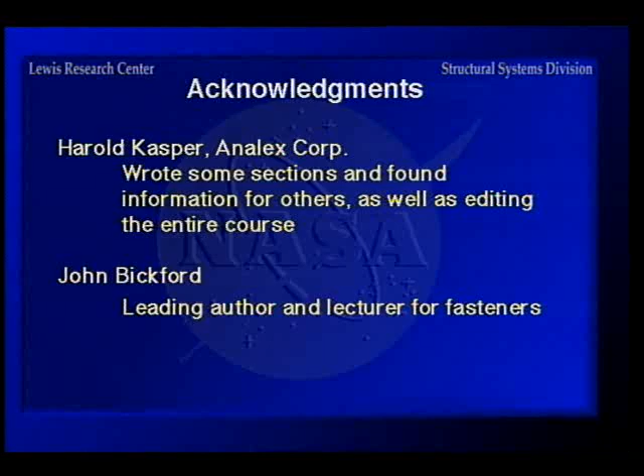John Bickford, who is the leading author actually in the fastener field, he is the editor-in-chief of a book which I was a contributing author for. It'll be published at the end of the year. I used a lot of John's stuff from his book on fastener design in this course. Bing Blendoff from Clemson University, who's actually chairman of the Bolting Technology Council, a council dedicated to furthering the knowledge on fastener design, has contributed some as well.

And Betsy Dela Cruz, who did all of the typing, retyping, running, and so on to get this thing together, and we just about ran out of time. But that's why we did not give it before, and I say it's approximately a 2-day course. Then Harold Kasper from Analex Corporation edited the entire course and had some very helpful comments. So with that in mind, we'll proceed with the little introductory material.

Now, there's a statement everybody knows about bolts and nuts, but do they really know about bolts and nuts? Sometimes we oversimplify things because we think because it's something that a kid took off of a wagon that it's simple for everybody.

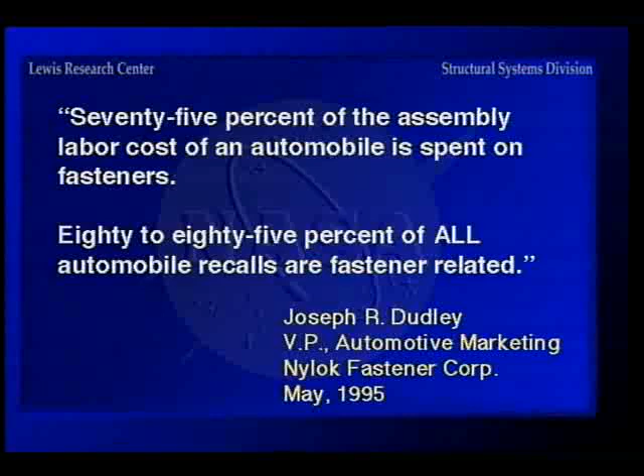Joseph Dudley, who is Vice President of Automotive Marketing for Nylok Fastener Corporation, gave these two quotes. 75% of the assembly labor cost of an automobile is spent on fasteners, and 80 to 85% of all automobile recalls are fastener related. Now that gives you an idea about the importance of fasteners in putting things together.

And of course, some of you remember on the shuttle recently when they had to cancel a spacewalk because a couple screws came loose and fell out in the gears. They couldn't get the door open. So things do go wrong like that.

Now, we have been hearing in the news for the past several years about counterfeit fasteners and all of that, and it's gotten quite a bit of publicity, and it should, but it still boils down to the fact that the designer has more to do with it than the manufacturer of the fasteners.

Now, here is something from John Bickford's book on a bolted joint, just a spring concept, because actually you don't think of it this way, but the joint material itself is a big heavy spring, and you're compressing it with small springs, which are fasteners, and we even get into joint stiffness and stiffness ratios and so on.

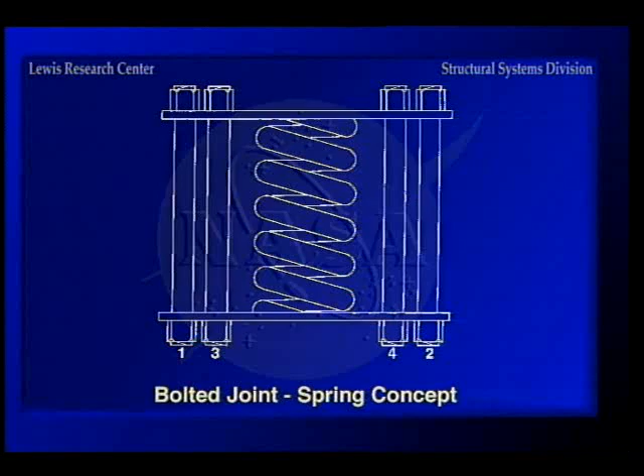Here's one on the internal drive systems, you can't read it too well on this one, but on the view graphs I think you can read them. A lot of these are common only to the aerospace world, like this, or the tri-wing type here.

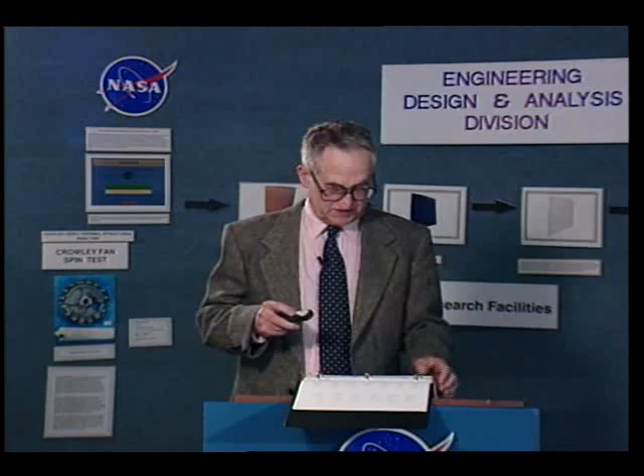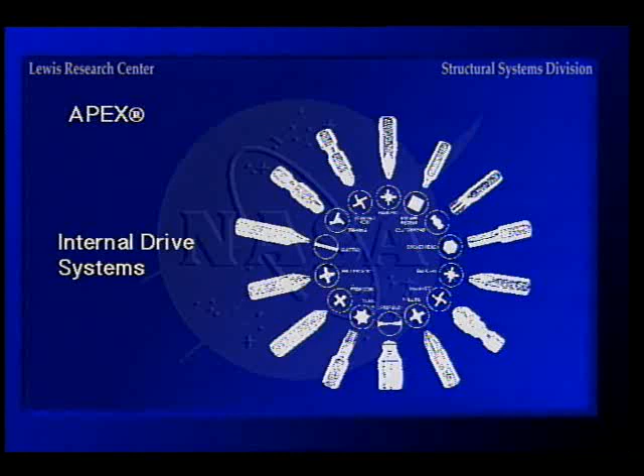These are used only by certain manufacturers. The Torx down here is very common in the automotive field. I always look at conspiracy theories of designers, and thought Torx was developed by automotive people just to make things more difficult working on your car, but I found out the reason they used it was that it centers better than the Phillips, of which there are various types, and will not cam out as much, so it works better in automated assembly.

So we'll move on into materials, and this I feel is a very important section, because you need to choose the right material to begin with, or you're dead in the water on a design.

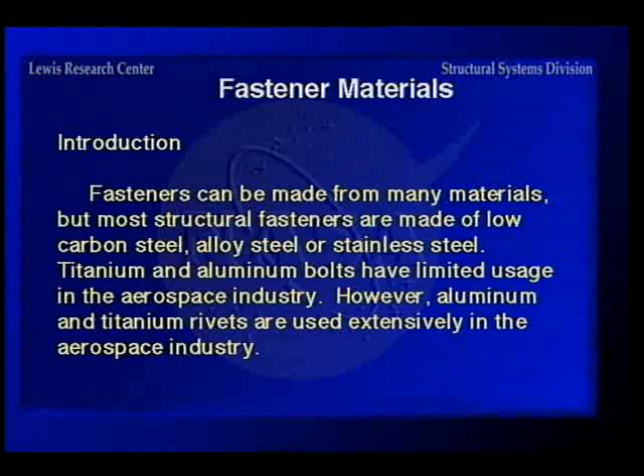Fasteners can be made from many materials, but most of those we're familiar with are made out of steel - the hardware store type made from low-carbon steel, and alloy steel for the grades 5s and 8s we use around here in the socket head cap screw. Titanium and aluminum bolts have limited usage in the aerospace industry, but aluminum and titanium are used a lot in aircraft design, particularly since you have aluminum skins on most airplanes, and you want the rivets to be the same material because differential temperature causes problems with expansion and contraction.

So now the alloy steel fasteners, you can get them up to 300 KSI - KSI being 1,000 PSI, so that's 300,000 PSI strength levels. But I'll try to point out here that in most cases you really don't want to do that.

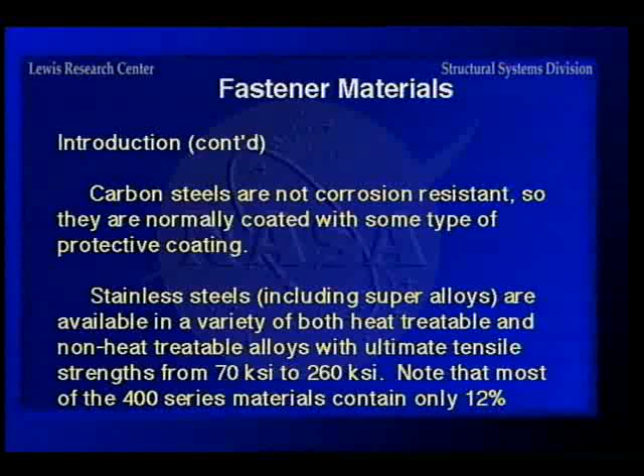Carbon steels are not corrosion resistant, so they usually have to have some kind of coating to protect them from rusting. The stainless steels come in all varieties, both heat-treatable and non-heat-treatable alloys, with tensile strengths of 70 KSI to 260 - the 70 being the ordinary 300 series stainless we use here all the time, and the 260 being work-hardened Inconel 718 or A286. Note that the 400 series materials contain only 12% chromium, which will allow them to rust some, so if you're building something you want to look pretty, the 400 series stainless would not be advisable.

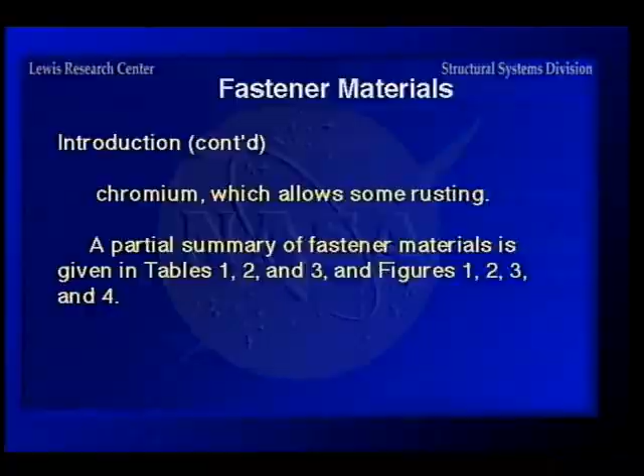On some of the subsequent tables we will show various materials, but let's go on in order to the selection of materials. You should use common fastener materials, strength levels, and coatings if you can.

There's no sense in overkilling on any design because it just costs you money and time usually. Weight savings versus cost must also be evaluated for flight articles, and there you do spend a lot of money to save a little bit of weight.

Galvanic and stress corrosion tolerance levels have to be established and checked out. And of course the operating temperatures have to be determined before the material is chosen, both the high and the low, to make sure the materials are compatible across the entire range. And then the type of loading, static or fatigue loading, is also a factor in material selection.

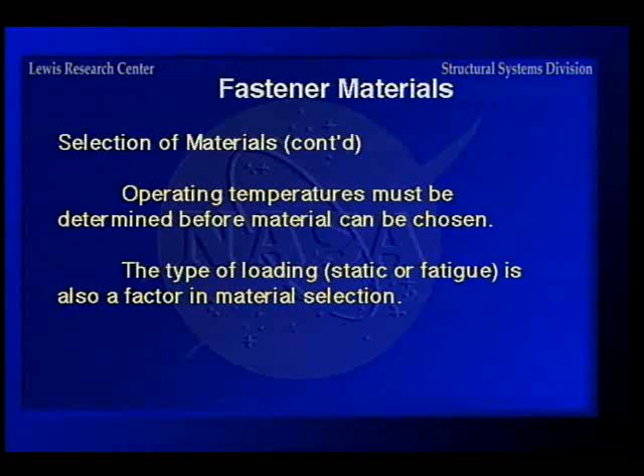Now, as far as availability of materials, the carbon steel fastener materials, everybody's familiar with the 1010, 1020 that we use around here. That's just iron with carbon in it and a few impurities, up to 0.28 carbon. I'll explain this further in another chart, but the carbon content is usually called out in points, and it's actually hundredths of a percent. So this 0.28 is hundredths of a percent of carbon.

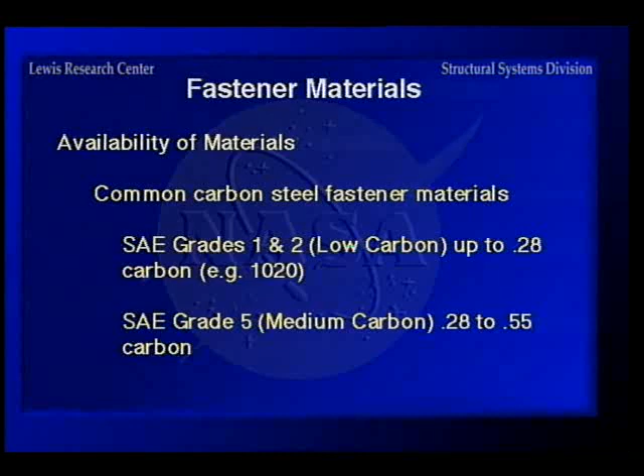And you need, for heat treating, unless you add something like boron to the material, about 25 points of carbon to get it to heat treat properly if you're going to heat treat a fastener. The grade 5s and grade 8s are in the 28 to 55 point carbon range so that they're heat treatable. The 8s have other alloying elements in them to bring them up to the strength that you want, and 4037 is one of the common materials for grade 8.

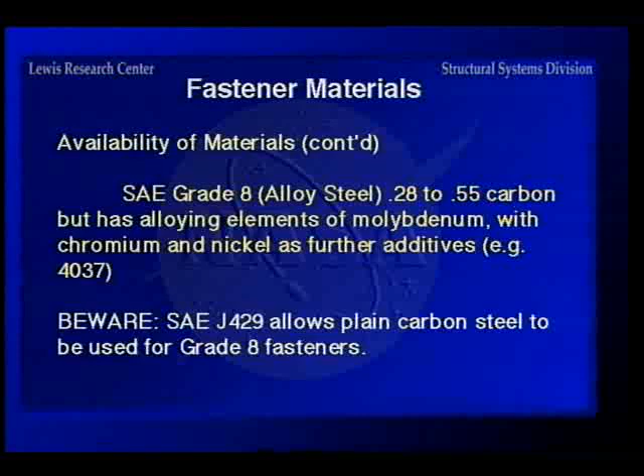Here's something I wanted to point out: Charlie Wilson from the Industrial Fasteners Institute has been trying to get this changed for years, but it's still in the SAE J429 spec for grade 8 fasteners. There's a footnote that allows the manufacturer to furnish these in 1045 plain carbon steel if the buyer agrees to it. The only thing is, if the buyer doesn't know he's agreeing to it, he can get one that will not have very good impact resistance. We had a problem we were in on one time with the Army on some Abrams tanks, where when they fired the cannon, it broke the bolts on the turret because they were made out of 1045 steel.

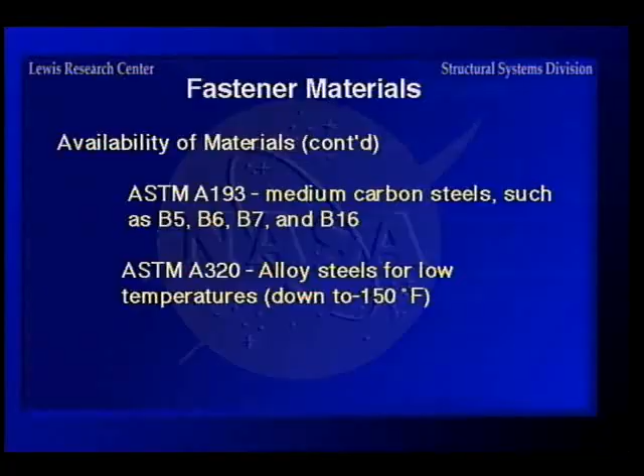Okay, moving on. Now, the ASTM fasteners are used primarily in the construction industry. Since a lot of you are not familiar with them, and I'm not that familiar with them either, I put in some equivalency here, like the A307 is a grade 1 in the SAE that we're familiar with, and 449, 354. The A193s are the B5, 6, 7, 16s, and also the B8 stainless steel. Those are used a lot for the pipe flanges that we design around here, so a lot of you are probably familiar with them. The 320 is an alloy steel for low temperatures, 325 is sort of equivalent to a grade 5 in strength, and the 490 is the highest strength of the construction type fasteners.

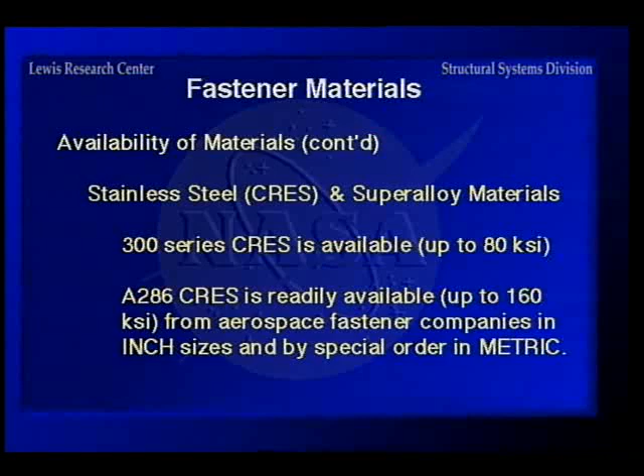Now, stainless steel, which is a CRES designation for it, corrosion resisting steel - stainless steel is the same generic terminology - and the superalloy materials. The 300 series that we're familiar with around here, you can get it up to about 80 KSI because it's not a heat treatable material, so the only way you can get the strength up is by work hardening it in forming, starting with annealed material. A286 we use all the time in the aerospace world, up to 160 KSI. It's a very common aerospace material, and you can get it in metric by special order. The 400 series is available in limited strengths up to 125 KSI, and it's also available in metric, which I will show you further on.

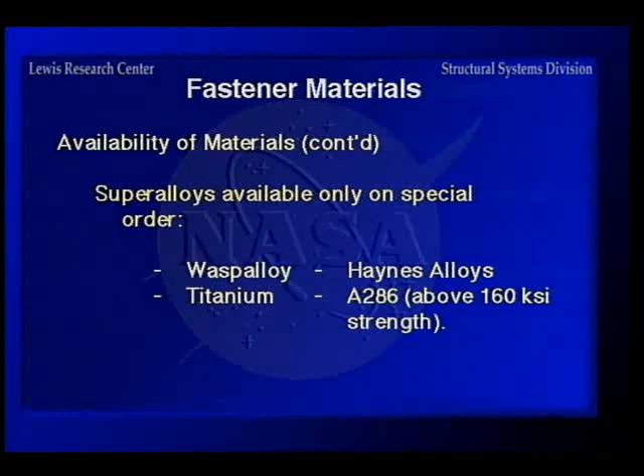Now the super alloys here, these are the ones that you guys come around looking for when you want something for a particularly stringent environmental set of conditions like high temperature, corrosion, and so on. These are all stainlesses here, well, titanium, of course, is very corrosion resistant also. The MP35N and MP159 are made by SPS, they have the patent on the material, and they are super corrosion resistant and high strength up to about 220 KSI. Inconel X750 is used for high temperature, and the Haynes alloys, and then the A286 above 160 KSI strength is a special, because in order to get it above about 160 KSI, you have to work harden it in addition to heat treating it.

Now, here's a table of fastener materials. I won't go through each one of these, but I wanted to point out how to figure out what the designation is. The AISI and SAE numbers are usually the same for the steel.

In this case, the 2 is the class of material, which is a nickel steel. The 3 is the approximate percentage of the main alloying element, which is nickel. And the 17 is the carbon content. So this is a low carbon alloy steel, 2317. That has no special significance other than illustrating the system.

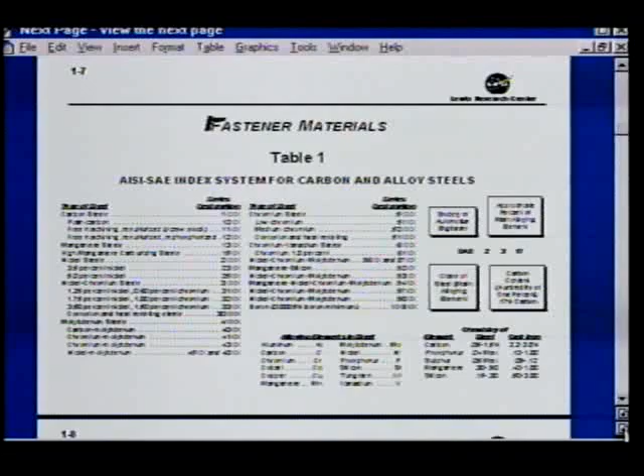Now for the nickel chromium steels and molybdenum steels and so on, here are the ones used mostly for fasteners in alloy steels, the 4000 series. You have 4037, 4140, 4340, that type of thing used for fastener steels.

Now, on chemical compositions, I'll stay with this table. Here you see the ordinary hardware store varieties, and you'll notice all of these other elements are not listed. One thing you can run into if you're having a real problem is that sometimes you get steels that have things in them you don't want.

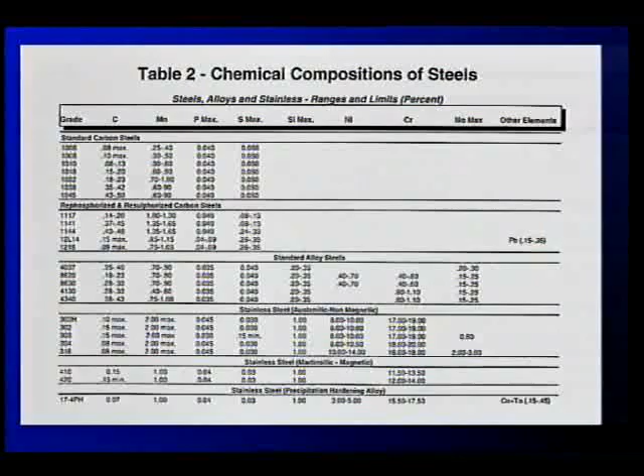A guy from Lincoln Electric was pointing this out to me, that in welding they're running into that because a lot of steel is made out of scrap. The scrap has most anything in it, so they're getting a lot of impurities they don't want.

Then you get down to the standard alloys, the stainless steels. One I wanted to call your attention to is in the 300 series stainless steel. They left out the L designations, the low carbon versions, because a lot of the time you want to minimize the amount of carbon in it, so you use a 304L or 316L or something like that, and they did not put that in the table, so you might want to just flag it.

All right, moving on now to operating temperatures. Here I have grouped this in categories, and so minus 65 and below, that's your cryogenic temperatures.

Now, of course, those of you who have been around long enough remember the Atlas and Centaur. They're liquid hydrogen fueled, so the temperatures you're running on that type of vehicle are anywhere from about minus 300 to minus 423. So you cannot use carbon steels at those temperatures because they will crack like glass.

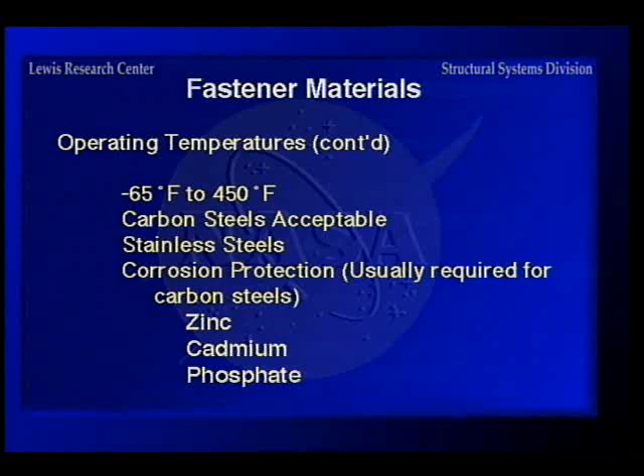Then you go to the minus 65 to 450 range, which is an ordinary range for most engineering designs. Carbon steels are okay, and stainless steels are okay, but then you get into needing corrosion protection for the carbon steel with various types of plating like zinc, cadmium, phosphate, or black oxide, and those will be covered later in the platings and coatings section.

Now, for 450 and above, believe it or not, you can use unplated carbon steel up to about 700 degrees because the only thing you're looking at is how much the allowable drops for the temperature. So if you go into a book like Mil Handbook 5, you can find temperature curves for carbon steels, find it, use it.

But the reason I'm saying unplated is that an awful lot of the platings for steels burn up before you get to that temperature. So these are some of the ones that don't hurt you, at least.

Now, I'm giving these because of their temperature range rather than the fact that you normally would not silver plate a carbon steel, but you do silver plate stainless steel. Silver, nickel, chromium plating, and chromium plating is used on some high-strength fasteners for aircraft landing gear, that type of thing.

The black oxide coating that you're all familiar with from hardware store bolts looks good and all that, but it burns off. Then you have diffused nickel cadmium, which is a special one that will be covered later. And then, of course, you can use the stainless steels and super alloys without anything.

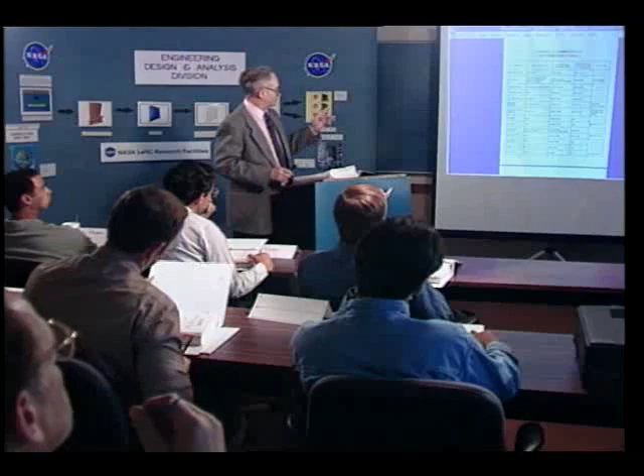You can't read this one, so I'll go over to this one. One of the things I wanted to point out is the useful design temperature on these. You find that A286 is one of the best, minus 423 to 1200. But you get down through all of these, and you find that Haynes 230 at the bottom is the only one that will carry you up to 1800 degrees.

Now, the significance of this is that on the NASA program, the National Aerospace Plane, we developed all of these super duper materials to build airplanes out of, but we never did anything on developing fasteners to put them together, because regular metal fasteners is the only thing they have to put them together.

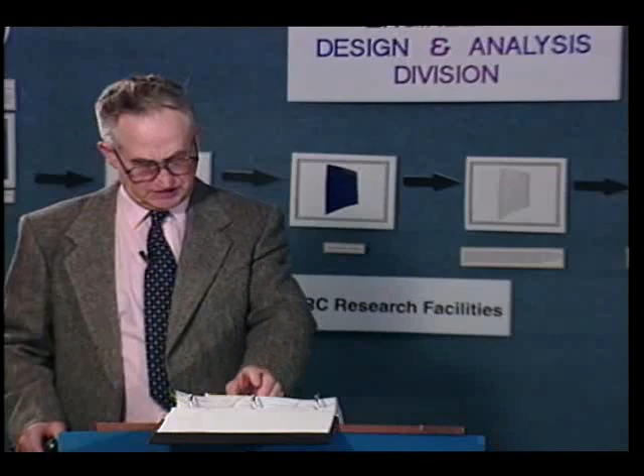Okay, moving along now into the galvanic corrosion and stress corrosion area. Galvanic corrosion is something we're all familiar with, although we may not use that title for it. If you get a scratch on the chromium plating on your car, it will rust faster than if it didn't have any plating on it, because you have a very small anode and a large cathode being the rest of the surface. So the anode is deposited on the cathode, which means it rusts away. So rusting is galvanic corrosion.

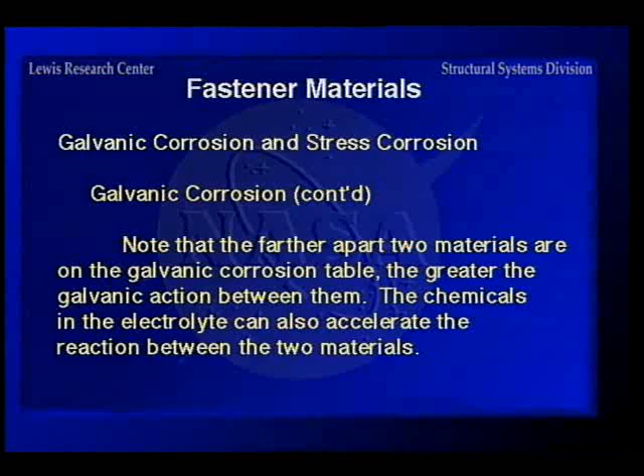Later on, we have a table on the galvanic series that will give you the location of these metals, and the farther apart they are in the table, the bigger galvanic corrosion cell you develop between the two of them. Cadmium and zinc are adjacent to aluminum in that table, which makes them compatible as coatings for steel fasteners used in aluminum.

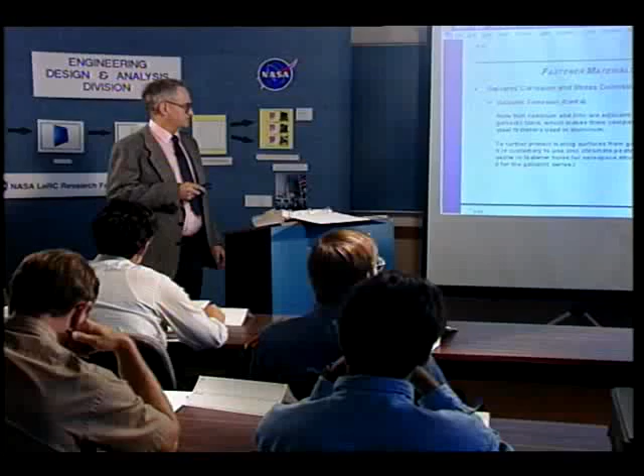To further protect mating surfaces from galvanic corrosion, particularly where you're putting in rivets and you pilot drill one piece and then drill it through, you have raw surfaces that are not plated with anything. So you either use a zinc chromate paste, or there's a Mil 8802 sealer that will deter galvanic corrosion.

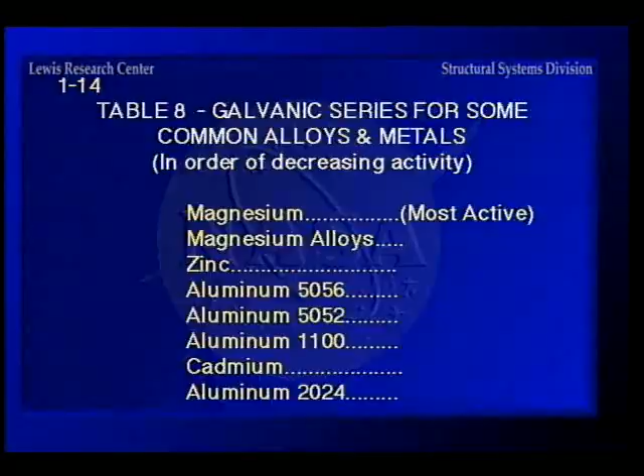Now here is the table of the galvanic series, and this is something you can find, I think Marks' Handbook and various places have it. One of the things I wanted to point out is that if you look at cadmium over here, it is right in the aluminums. Also, zinc is there. So if you use a cadmium plated fastener in aluminum, you will get less galvanic corrosion than you would, say, if you used one of these down here, like a brass or copper or Inconel or something like that.

Now, notice there are two different designations for the stainless steel: active and passive. Normally, stainless steels are passivated, which means they're treated with an acid dip to remove any kind of scale from processing, and to form a protective oxide on the surface. The passivation of steel corresponds to anodizing of aluminum. So that's why they have it shown differently here, passive and active, because the passive is much more corrosion resistant.

Okay, now going to stress corrosion. That is something we're all familiar with in a sense, but there's not much available in textbooks on it, because the study of it is a fairly recent thing. Stress corrosion occurs when a sensitive material is loaded in tension in a corrosive environment. That sounds pretty easy. What happens is the surface develops pits or cracks from exposure, and this gives you stress risers, which will cause the component to fail at as little as 20% of its calculated load capacity.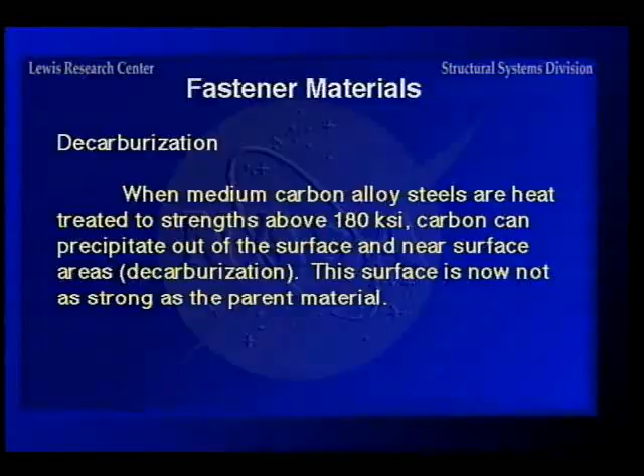Here's another one you can run into, although not as common as stress corrosion. When you heat treat a carbon steel, you can actually precipitate carbon out on the surface. I'd compare this to charred wood, which is very soft on the surface, because that's essentially what you're getting - a heavy carbon coat on the outer surface that's not as strong as the parent material. On machine parts, they sometimes just machine that off and use the part, but on a fastener you can't do that, so you have to be careful about decarburization. And once again, it's on strengths above 180 KSI.

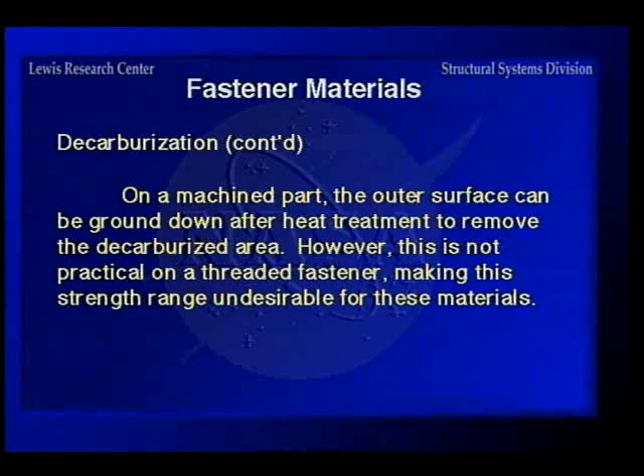Now, temper brittleness is another thing you can run into on high-strength fasteners. After you've quenched them, you need to go back and temper them, which means holding them at a fairly low temperature to get the strength you need. But that also causes the material to be brittle. So carbon steel fasteners above 190 KSI are a real risk as far as brittle failure.

If it falls below about 12%, the steel rusts. This is why, if you're going to have welded joints, you try to use a 300 series with an L designation, which is low carbon, and even use a low carbon weld rod. Or better yet, and this is what we did at Martin Marietta on the Titan, you use 321 stainless because it has titanium in it. Or you can use 347, which has columbium. The titanium and columbium will combine with the carbon before the chromium will, so that leaves the chromium in solution and you still have the corrosion resistance.

So keep that in mind when selecting fasteners for anything above about 800 degrees in stainless steel - use 321 or 347. Now, on material strengths...

After the temperature and corrosion requirements have been determined, then you've got to look at the material strength. Keep in mind that the higher the strength of the material, the more stringent the manufacturing and quality requirements become, because it's more sensitive to imperfections. If weight is not critical, it's better to use a lot of fasteners of lower strength than to use a few high-strength fasteners. Use those old grade 8s if you can, if you don't have to worry about weight.

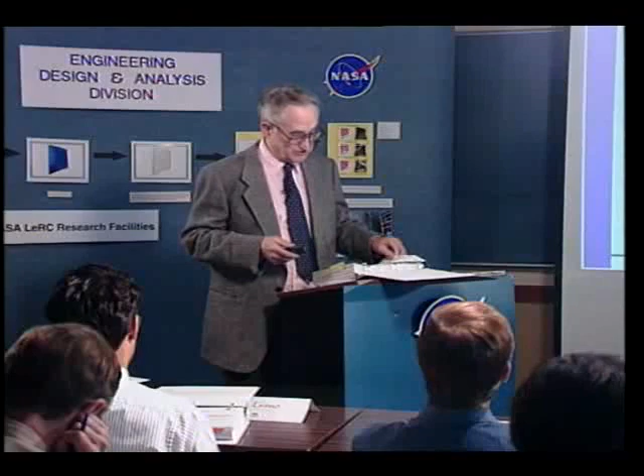Now here's metric fasteners, and that's one of the least understood things, I think, among most design engineers. I'll admit it's confusing to me, although my buddy Bing Glendoff, who came from Sweden, says that metric is the way of the world. He thinks it's great, but I still have trouble with it. So we'll go through some of the peculiarities of metric fasteners.

On the property classes, that's the way they specify the strength - tensile ultimate, and then yield as a percent of the ultimate, in megapascals. And a megapascal is 145.04 psi, for any of those who need to convert.

Now, the material is not specified in the call-out, so you have to specify the material yourself, or otherwise you don't know what you're getting. So if you have a property class 6.8, it's a carbon steel of some kind with an ultimate strength of 600 megapascals and a yield of 0.8 times that - that's where the 0.8 comes from.

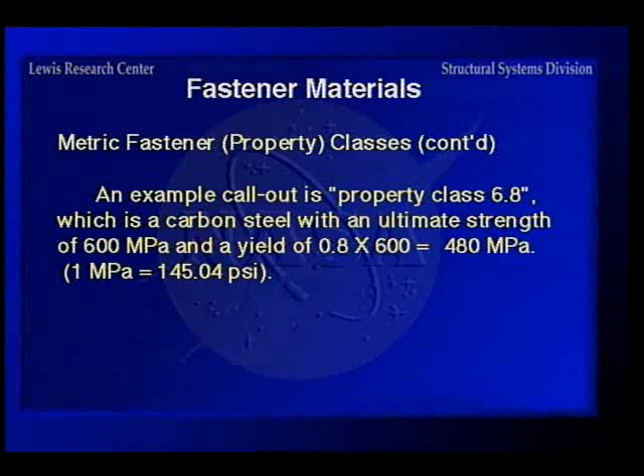Now, for some stainless steels, they don't use those rules, so I have a table further down the line that shows the peculiar type stainless steels and how they're called out in the metric system.

Here's something I had a little trouble getting people to understand, because when we had a government decree to go to metric fasteners for the CM1 project, or for all new projects, the metric aerospace fasteners are not available in the European market. They use American inch-pound fasteners on their airplanes. I toured the Huck's rivet plant in Tucson a couple years ago, and the chief engineer told me at the time that the A300 people were their biggest customer on fasteners, because there aren't any aerospace fasteners available in the European market.

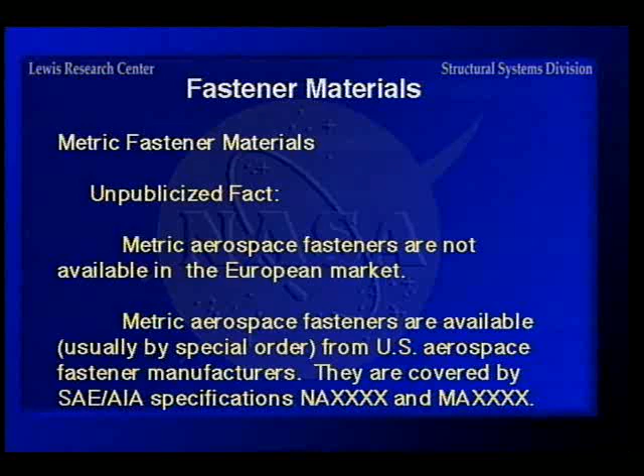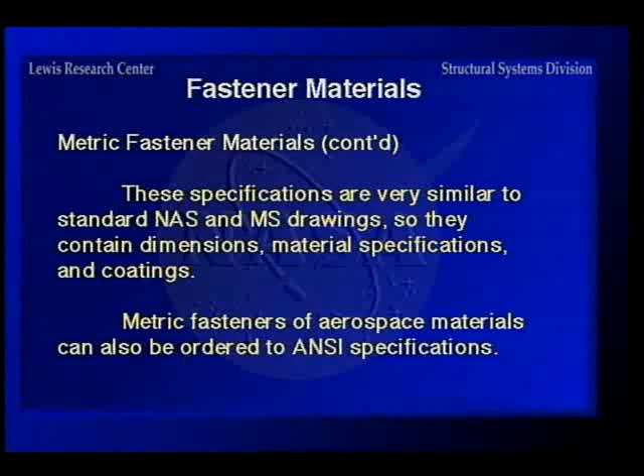So you can get them in this country on special order, and due to the fact that the property class is not enough to define the fasteners, the NAS committee and our agency fastener committee came up with doing it this way. You put out these AIA, actually NAS specifications that are for metric fasteners only, very similar to the MS or NAS sheets you see all the time for the inch stuff, covering everything there - heat treat, material, all the dimensions, coatings, and so on, so you're completely covered. You can also order metric fasteners from ANSI specifications.

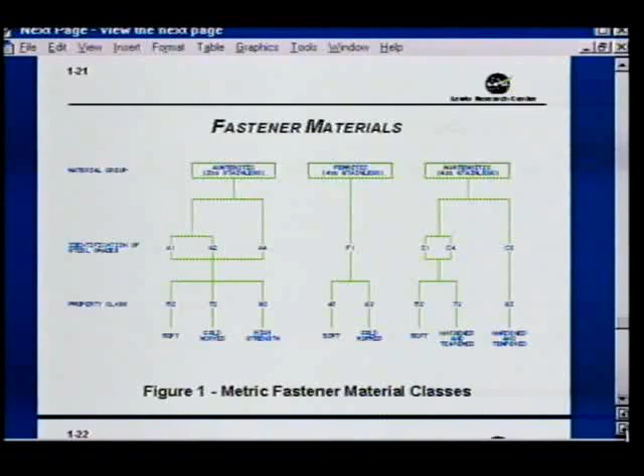Now here's a kind of square duck type table for the stainless steel metric fasteners. These different classes here - A1, A2, A4, and so on - and then the 50, 70, 80, 45, 60, 50, 70, 80, and so on. For some reason or other, you need to add a 0 to those to get the actual strength of the material. They made them a class like that. So the 50 here is a 500 megapascal ultimate strength. The only way to identify them is to put them in a table like that where you can refer back to them.

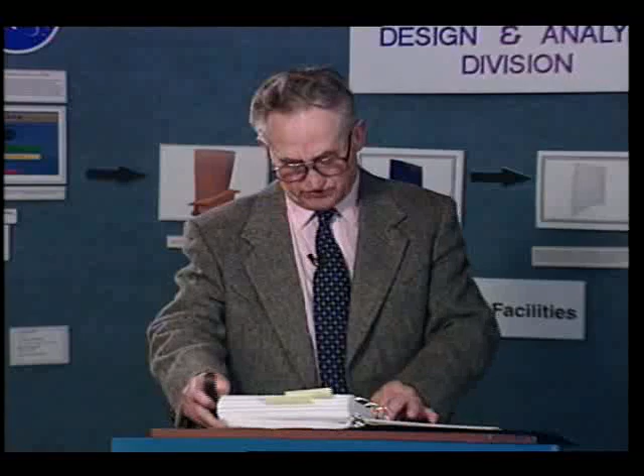Now, going to figure 2, I will not go through all of this, but this is from the Metals Handbook. It just gives you a good overall view of the 300 series and the things you do to it to tailor it to your needs. You probably can't read that even here at all, so it's in your handout, and you can refer back to it at least when you're picking a material.

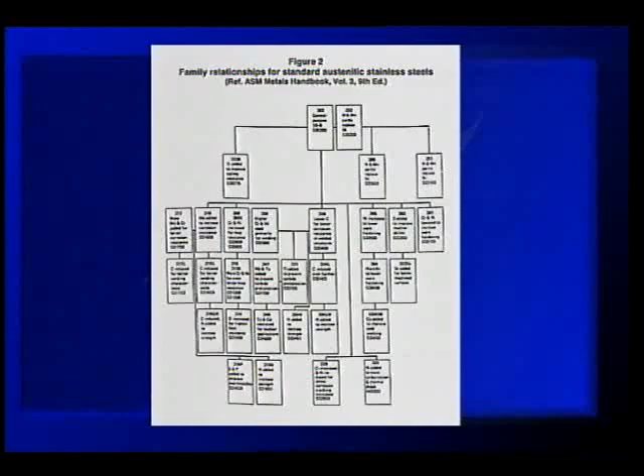Then we go into a glossary of terms for materials, and once again, there's more here than I will cover in this presentation, but some of the things I wanted to call to your attention about the alloy steels - normally we use the 4000 series.

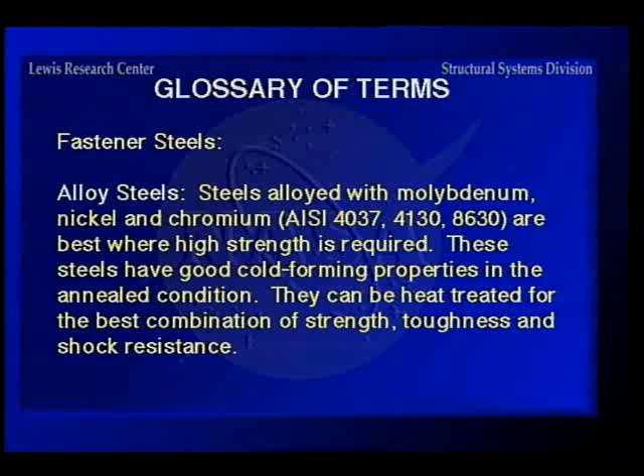Then on aluminums, which I cover here, if you want more information on those, you can go to the Aluminum Handbook, put out by the Aluminum Association, which will give you more information there. If you look under aluminum alloys, the 2024, 2000 series is heat treatable. The 3000 series isn't. The 5000 series is not heat treatable, but some of them are stress corrosion sensitive. And of course the 6000 and 7000 we use all the time - they are heat treatable.

The leaded steels are used sometimes for making one-of-a-kind type screws. Lead is added to steel to make it easier to machine.

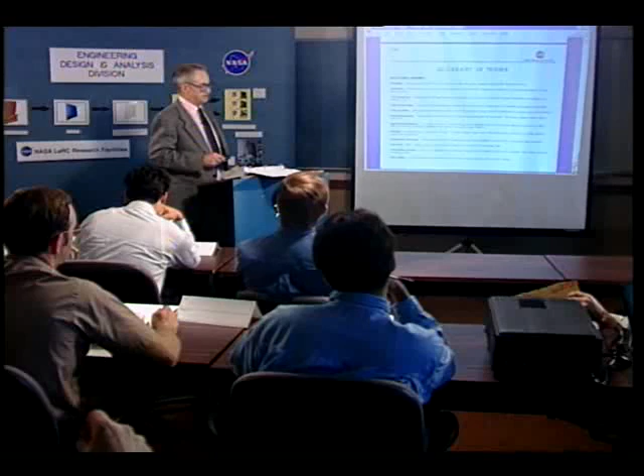Going over to the stainless steels, there's also a 200 series stainless steel that's very similar to the 300. We had a problem down at the Cape one time where they couldn't determine whether they had used 300 or 400 series fasteners. The way you check is with a magnet - 400 series is magnetic, 300 series is not.

Moving on to the mechanical definitions part, you get into cold working. Plain carbon steels will cold work.

The plain carbon steels, you can cold work them during deformation. In fact, one of the reasons they start out with the so-called wire - 3/4 inch wire doesn't strike me as being wire, but that's what they call it in the fastener plants - they run it through an annealing furnace to get it as soft as possible before they start. The fasteners are actually formed out of this annealed wire, and they are cold worked during the forming. I was involved in a court case on a product liability issue where the nut was actually harder than the bolt, because the nut had been cold worked more than the bolt, and it stripped the threads off the bolt and caused a chair to fail, and the guy got hurt.

So just wanted to point those out to you. Now going on to this next glossary of terms on the process definitions. One thing I wanted to point out is killed steel, which normally you don't find, and that's important because it makes the steel chemically stable so you won't get into troubles. I always point out defects that have happened along the line - you remember the cars, I believe it was the Fords and Lincolns that had the bumper beam that disintegrated on them. That was because the steel was not killed properly, as I understand it.

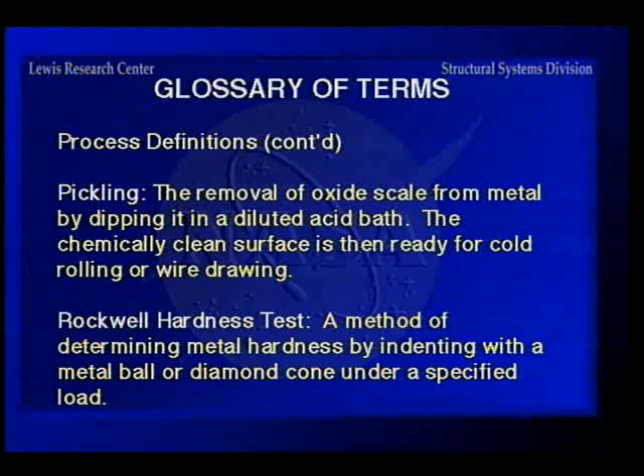So you can get disastrous effects from it. The pickling is also a removal of oxide scale by dipping the steel in a bath, and these are important to prevent corrosion on the material during the manufacturing process, whether it be fasteners or general hardware.

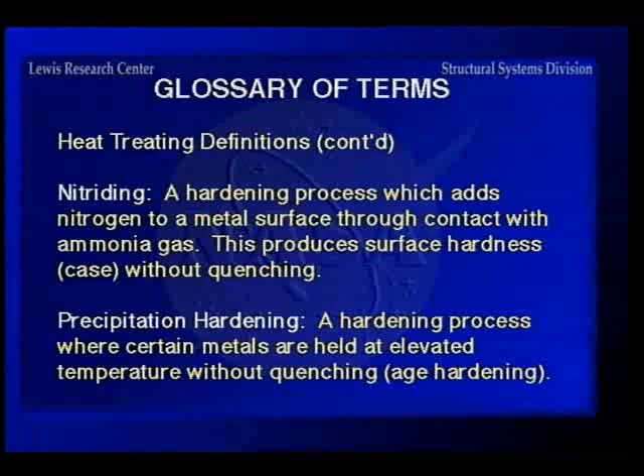Now the carburizing I covered, so we'll not go over it. Nitriding and case hardening - in cases like that, it's where you have a material that you want to remain ductile because it's some sort of an impact type thing. So you case harden the surface by putting enough carbon on it that you can harden the surface just to get it slightly hard.

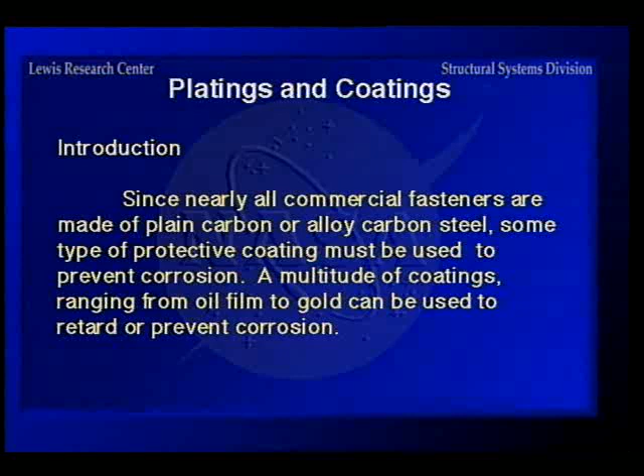Now moving to platings and coatings - nearly all commercial fasteners are made of plain carbon or alloy carbon steel, so you need some sort of protection on them to keep them from rusting. You can go from putting good old 10W30 oil on them all the way to gold plating. Gold plating is not used on fasteners usually, but other than pins on tubes or something like that in the electrical field, electrical contacts and so on. But if something is small enough, gold plating does not become that expensive to coat it.

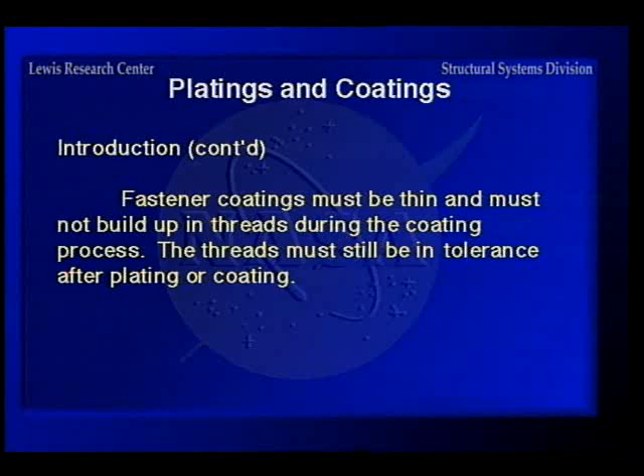But usually we go with something less expensive. So what you're looking for is a coating that will give you the protection at the lowest cost. With fasteners, you've got to have a thin coating because the fastener threads have to be within tolerance after the coating, which is important. Now I know that if you get nails or something like that, Ron Romanchuk drives nails all the time that have been galvanized, and that's a dipping process, but it's not used normally on threaded fasteners.

Now on temperature limitations, the coating is more likely to set the temperature limit than the fastener material itself. Some coatings can be a disaster when they decompose, like cadmium - you get hydrogen embrittlement from the decomposition of cadmium. And others, like the good old familiar black oxide, bake off without doing you any harm.

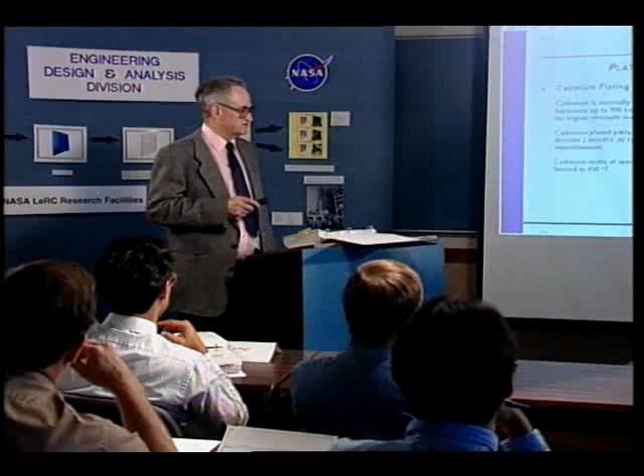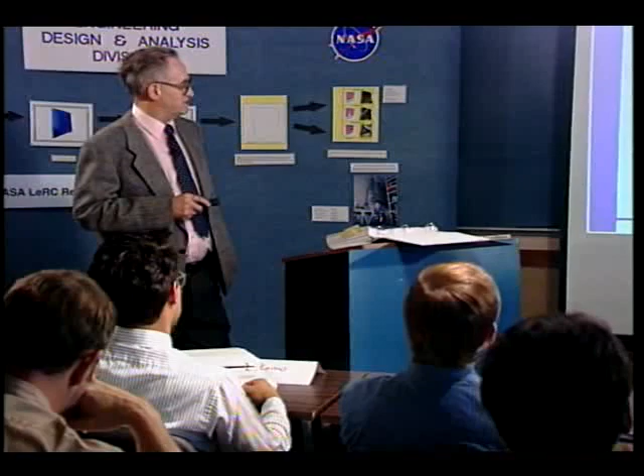Cadmium plating, although people say it's going away because of environmental problems, that's really not true. When I talked to a guy at Boeing about their development of replacements for cadmium, he said, as far as we're concerned, there is no replacement for cadmium. We're going to go ahead using it. So it's just the idea that you have to control the process in order to keep the EPA off your back.

But it is used for electrodepositing alloy steel up to 190 KSI. If you get above 190 KSI, then you can't prevent hydrogen embrittlement, and you have to go to a vacuum deposit, which runs the cost way up.

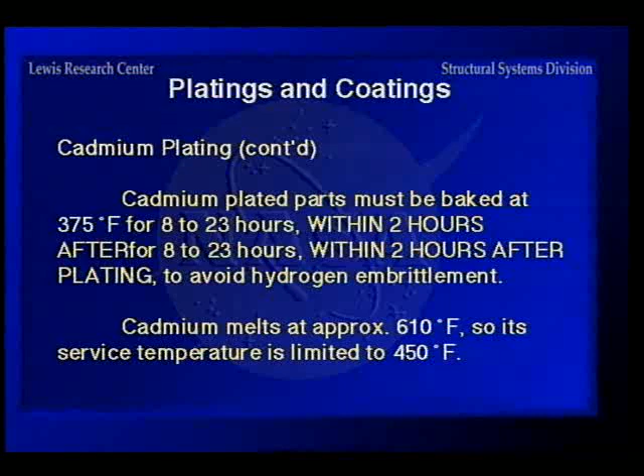Now, here's something that is overlooked a lot and causes lots of problems. When parts are cadmium plated, they have to be baked within 2 hours after plating. I said 8 to 23 hours because it depends on who's baking them, or if any baking is done at all - I have heard of cases in which no baking was done to bake the hydrogen out.

Whenever you do an electroplating process, it's done in some sort of aqueous environment. So as you know from charging your battery, you get free hydrogen whenever you put electrodes in water. You have free hydrogen ions, and hydrogen can go where anything else can't go. So you get hydrogen given off during the process, and unless you bake the material right after, you're in trouble. Cadmium melts at 610 degrees, so its service temperature is limited to 450.

Now the advantages of cadmium: it has good salt spray resistance, so it's very good in marine environments for airplanes where they're exposed to salt all the time in the winter time. It's consistent on the torque friction properties. It has a good galvanic corrosion location, and it doesn't decrease the base material fatigue strength.

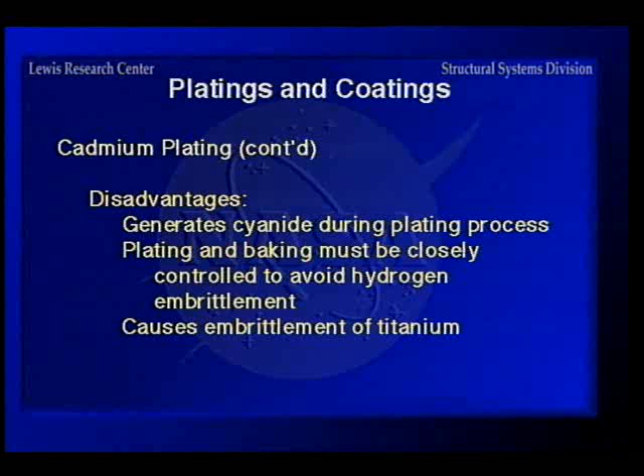But the disadvantages: it generates cyanide during the plating process, which is nasty stuff that the EPA watches very closely. And of course, the plating and baking has to be closely controlled to avoid hydrogen embrittlement. It causes embrittlement of titanium. It's very expensive, and it has to be vacuum deposited on high-strength parts to avoid hydrogen embrittlement.

One of the other advantages I didn't list: it does not support fungus growth, whereas a lot of platings will. Since cadmium is kind of a toxic thing, your molds and stuff like that in a marine environment can't grow on it.

Now, zinc plating. Zinc is very common. Most of the fasteners that you buy that are plated are probably zinc plated. And of course, hot dip zinc plating is called galvanizing. Roofing nails, that type of thing, are galvanized. The corrugated roof and so on is galvanized. The zinc plating doesn't generate the toxic byproducts that cadmium generates, and it's a lot cheaper than cadmium.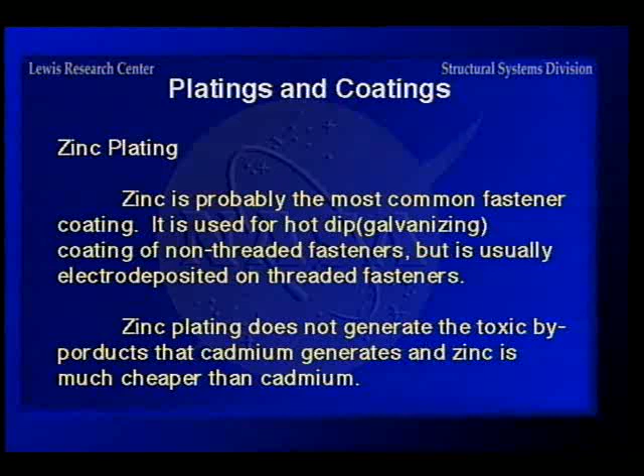But it will heal itself over by migrating over scratched areas. If you scratch an area - in fact, down at the Cape they did a study on how far zinc would migrate, and it would go over a scratch about 1/8 of an inch wide and go back and heal. It will kind of heal itself to a certain extent.

It has a good galvanic location, but it's not as good as cadmium for corrosion resistance. And the torque tension friction characteristics - when you're torquing up a fastener, you can get such a variation in the coefficient of friction that you can get in real trouble on knowing what load you're putting on it. Here's one of the other bad things about it: it has a useful temperature limit of only about 250 degrees, so you can't use it at all where you have elevated temperatures. And it can cause hydrogen embrittlement, although it's not as serious a problem as it is with cadmium.

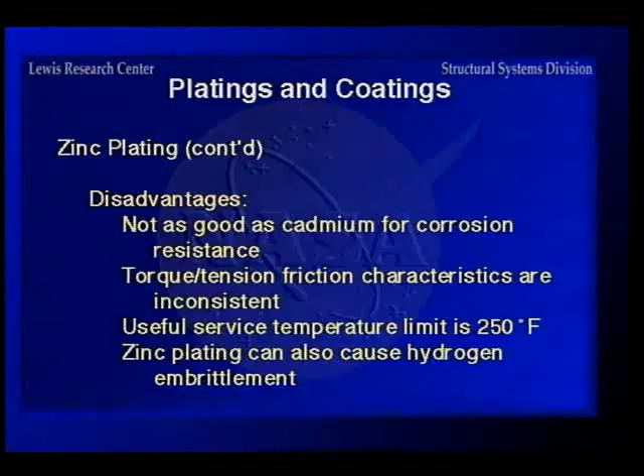Now, the phosphate coatings - this is used a lot in the automotive business because it's cheap. You throw a cup of phosphate in a barrel and put a bunch of fasteners in and shake them a few times, and you have phosphate-coated fasteners, more or less. So a mildly protective layer of phosphate is formed on the surface, and there are 3 different ones: zinc, iron, and manganese. The ones usually used for fasteners are the zinc or manganese.

Now, the advantages of phosphate coatings: they're cheap. You can coat them with oil or wax to increase the corrosion resistance. And phosphate is a good primer for painting, so if you're going to paint something after you've phosphate coated it, that's great. And you don't get hydrogen embrittlement from it.

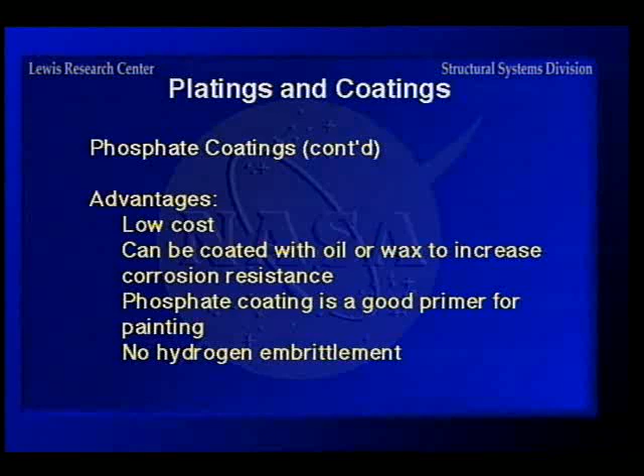But the disadvantage is it's not very good in corrosion. You get inconsistent torque tension friction properties, which means if you are supposed to torque a head bolt to exactly 2,000 pounds tensile load, you don't know what torque it'll take if you have different fasteners that were at a different location in the barrel. And they have a limited temperature range of 225 to 400 degrees.

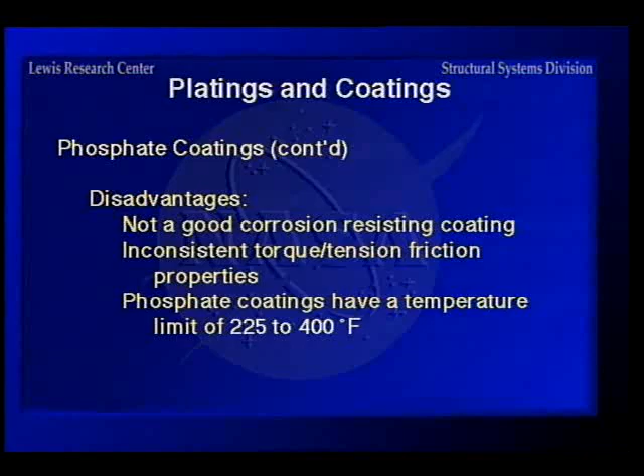Now, nickel plating. Nickel, with or without a copper strike, is one of the oldest methods of preventing corrosion and improving the appearance of steel and brass, but it'll tarnish unless it's chromium plated. It has a fairly high allowable temperature and good corrosion resistance. The disadvantage is it's more expensive than cadmium or zinc. It requires baking after plating to prevent hydrogen embrittlement, and it doesn't look too good when it starts tarnishing.

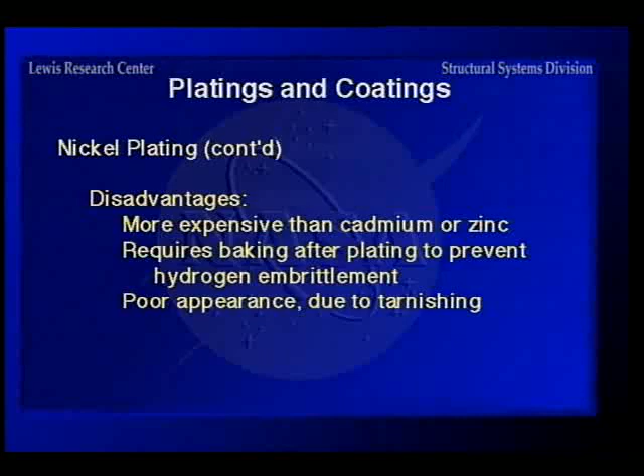Now, moving on to chromium plating. Chromium plating, as you all know, is used for automotive and appliance decoration in very thin coats, but it can be used for fasteners. As I mentioned earlier, it's used for coating fasteners for landing gear, this type of thing, where you require super high-strength fasteners or components, so you can't use something else like stainless steel, so you go to the very high-strength carbon steel, alloy steel, and then you chrome plate it.

But to get a good chrome plate, you've got to put a copper strike on first, and then a nickel over that, and then the chromium goes over the two of them. Otherwise, the chromium is porous to a certain extent. So unless you have something under it to help it, it doesn't work out too well, or you have to go with a fairly thick coat.

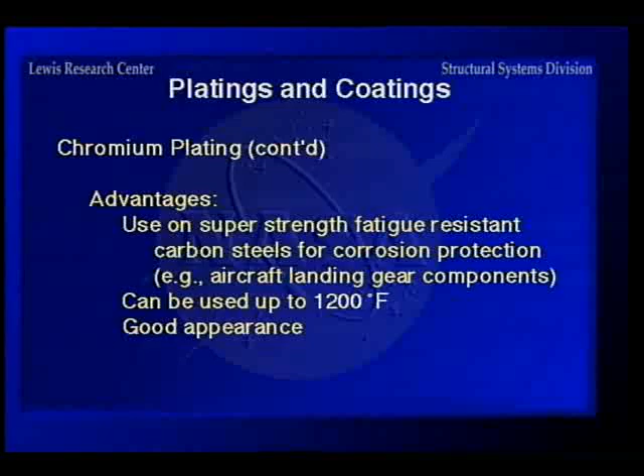It can be used up to about 1200 degrees, and of course it looks good. But the thing you run into is it's as expensive as stainless steel, so you only use it for special cases. And it requires very stringent quality control, because you know what a disaster it would be if you get a hole through it and the salt gets in it. Then you have something rusting very fast. And of course you have to do the baking to prevent hydrogen embrittlement with it, same as you do with the cadmium plating.

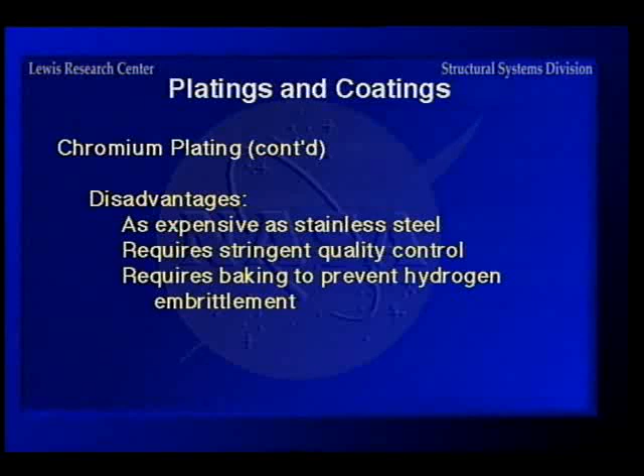Now here's the ion vapor deposited aluminum plating. This is a special one that was developed, I believe, by McDonnell Douglas for coating aircraft parts. It was going to be used as an alternate to cadmium plating. Well, it doesn't give you hydrogen embrittlement, and it insulates to deter galvanic corrosion, and can be used up to 925 degrees, and doesn't give off any toxic byproducts.

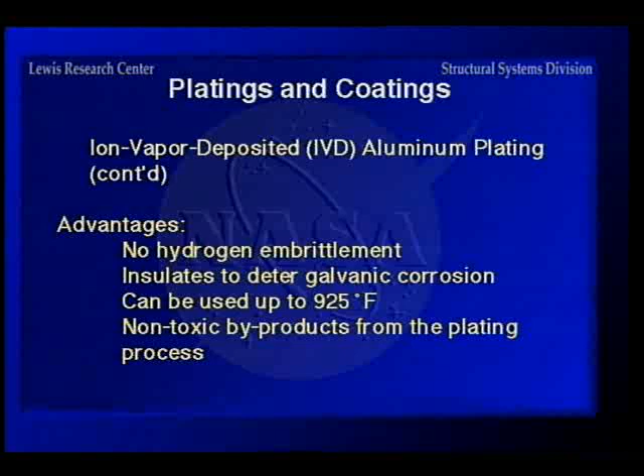But it's expensive and has to be done in a vacuum, so you can't just send it out to Joe Doak's plating outfit to get it done. And it's not as good as cadmium in a salt spray test, so it has not had that wide a usage that I know of.

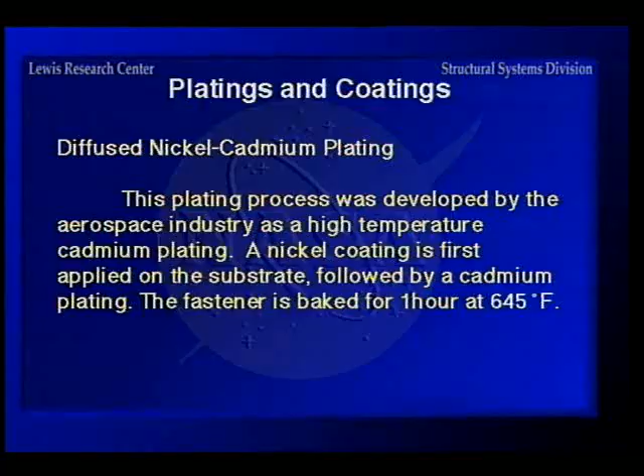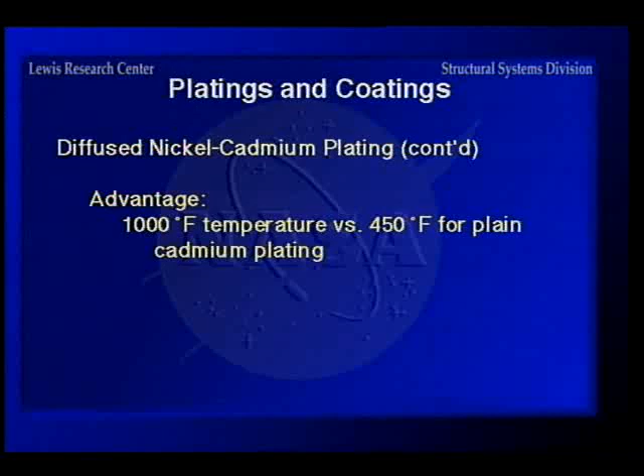Diffused nickel cadmium is another one that was developed by the aerospace industry as a high temperature cadmium plating. You put a nickel coating on first, and then put cadmium on over it, and bake it for 1 hour at 645 degrees. The advantage is you can get up to about 1,000 degrees exposure temperature, which is good, versus 450 for plain cadmium plating. But once again, it's expensive. You have to have extremely close process controls, and the nickel plate has to cover the fastener at all times to avoid cadmium damage to the fastener material. So it's not recommended for parts above 200 KSI strength.

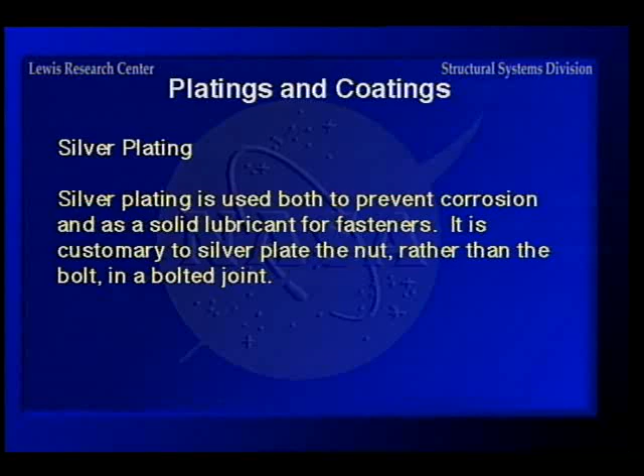Okay, silver plating. Silver plating is used to prevent corrosion and as a solid lubricant for fasteners. For instance, it's customary to silver plate a stainless steel nut for a stainless steel bolt in order to prevent galling and serve as a lubricant.

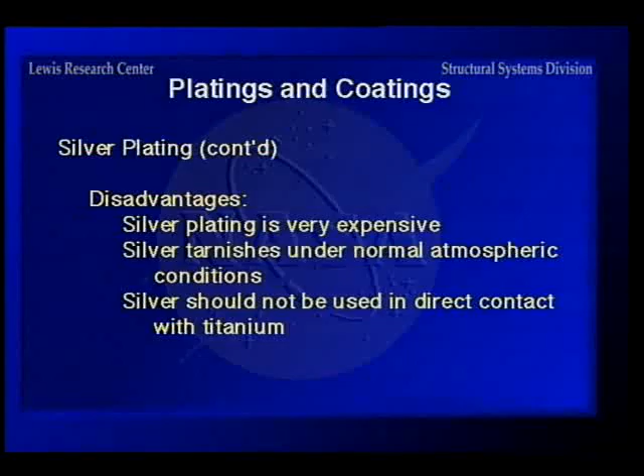Now, silver plating can be used up to about 1,600 degrees, and its disadvantages, though, it's expensive, it tarnishes, and it shouldn't be used in direct contact with titanium. So its primary use in the aerospace field is just to coat stainless steel parts on stainless steel to prevent the thing from galling.